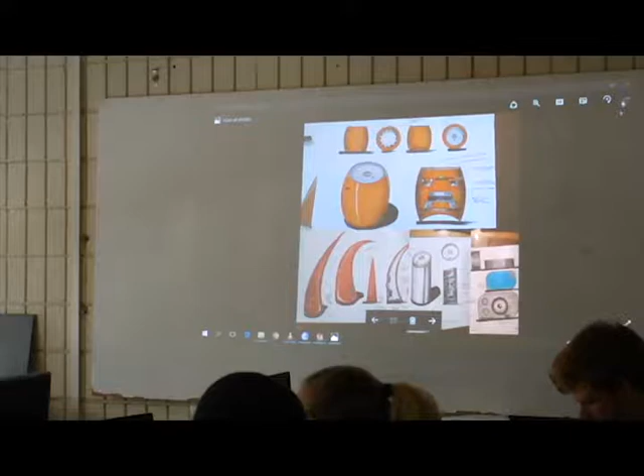So you guys know you'll start off from here with sketches, and it's nice, but if you go to a client like this, they're going to laugh at you. It's just not where industry does things anymore.

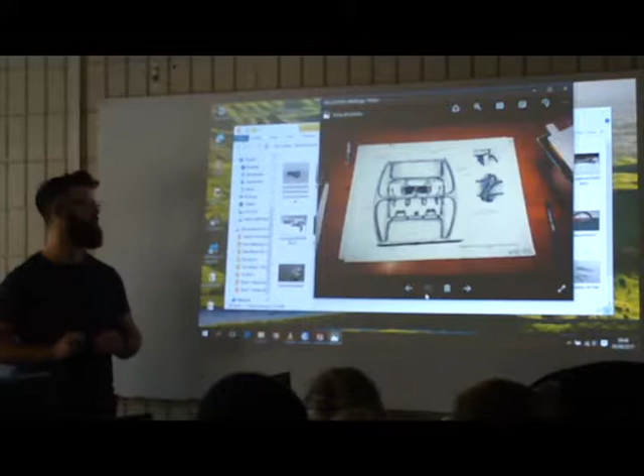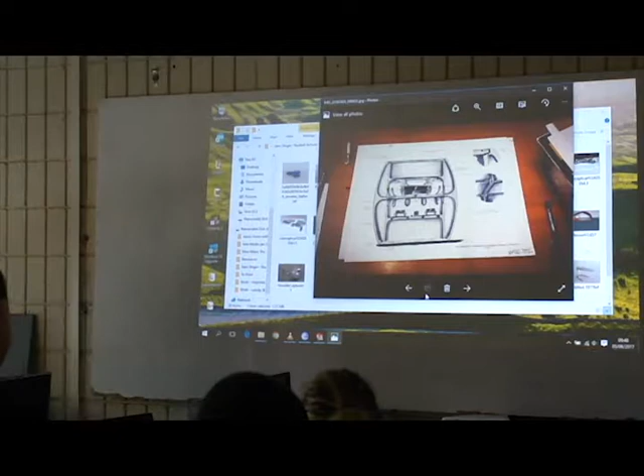So then you go from this, and take it into SolidWorks—this is one of the tricks I learned for getting really nice illustrations and drawings. You take it into SolidWorks, you can import it, make the technical drawing, and then render it. So you get really nice detail, you can do bubbles, all sorts of cool things, and just fake it out. Remember, it's more about how you get the result.

They just care about the result versus the process, and as long as you're good enough to fake it, like this, you can get away with it. So it makes things really, really easy.

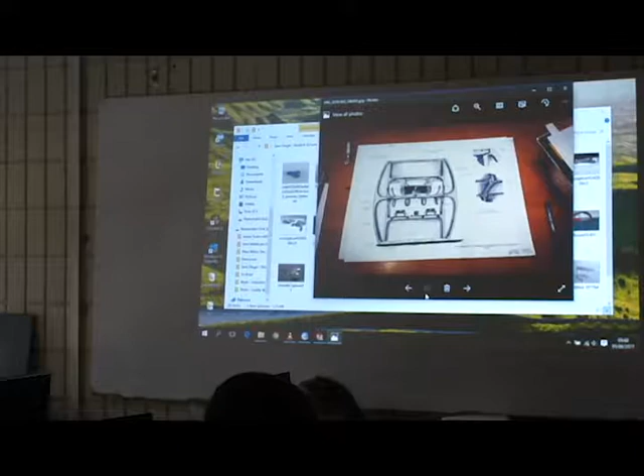And if you, like me, struggle or have a shaky hand, whatever, it's a really nice thing. It also enables you to leapfrog a process because you've already done the technical, so it saves you time later down the line. You can spend more time actually refining your prototype and your proper model, which is really, really cool.

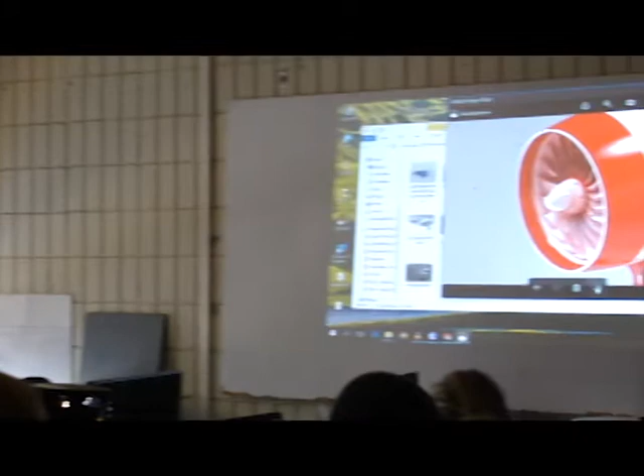These are just some of the works I've done to show you what you can do in SolidWorks, and how—hopefully... Is that all rendered in SolidWorks? No, this is Keyshot. These are just some of the things I've done and the way you guys will end up doing them.

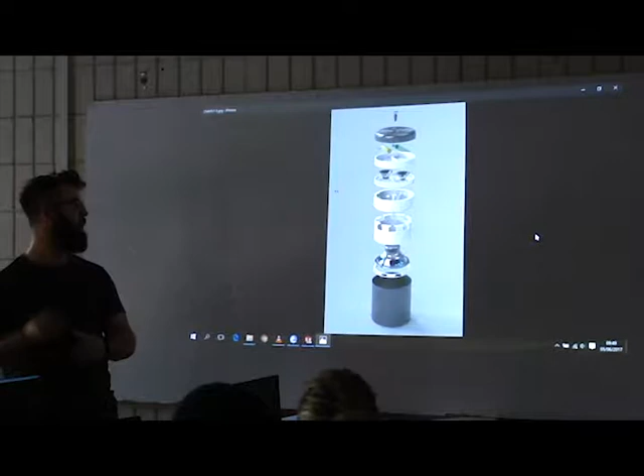And it's really cool for now—if you go into your presentations and processes next year and from now on, it's really nice when Darren or Craig or Chris asks you to explain the part, if you have technicals or product explanations.

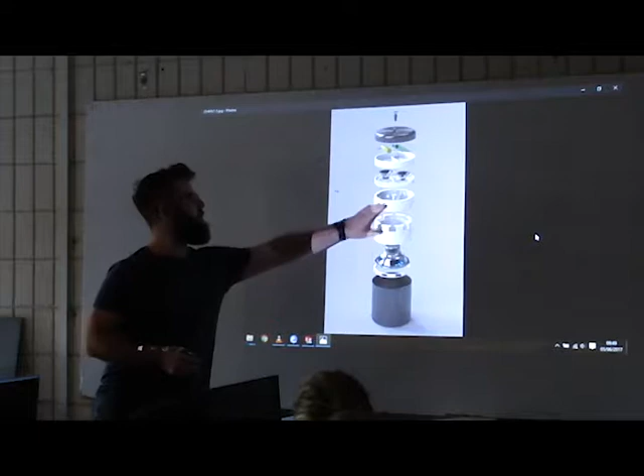You can now walk people through your parts using SolidWorks and a nice rendering program. You can justify, okay, I used this here, I can use this there, and it just takes your work to a really professional level.

And these are just, I don't know if you guys did them, the plugs that we did in third year. So I think you guys may do this, and it enables you to get really nice detail.

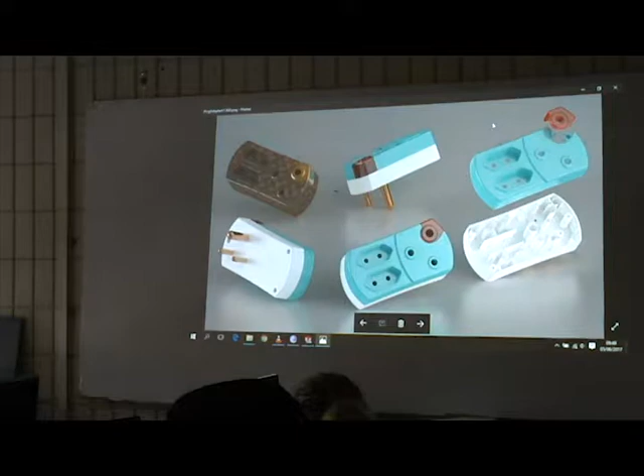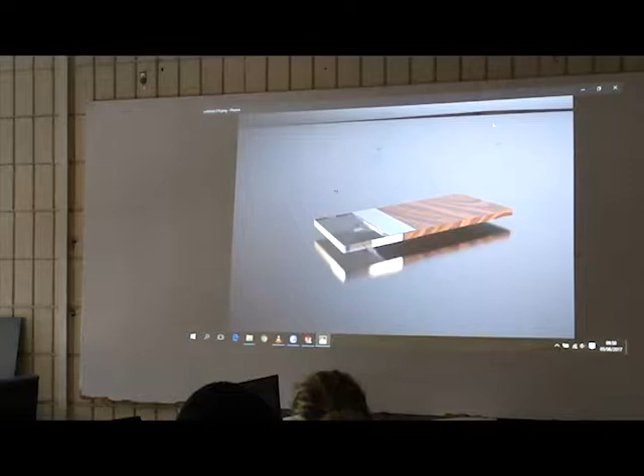Which, drawing-wise, is just a bit of a mission. I'm also going to be referencing these when I talk about certain features. This was my table from second year—so what you guys did, this was mine. This is just the rendered version. Concepts and stuff, yeah, that's pretty much what you can do.

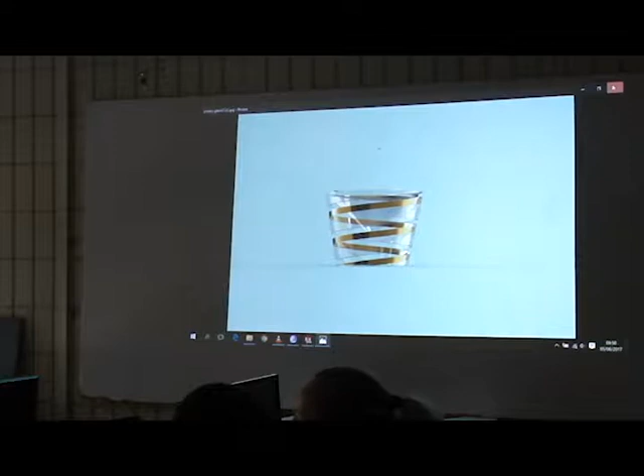And I'd like to note, none of this was done with surface design—this is all just general, easy things. Also, the benefit of CAD is you can go from this, from CAD to 3D printing, and then you have a cool little toy, which is really cool. It's fun to play with.

Yeah, this was the bike project. I don't know if you guys will probably have to do that. This was actually done in Solidworks and then popped into Keyshot.

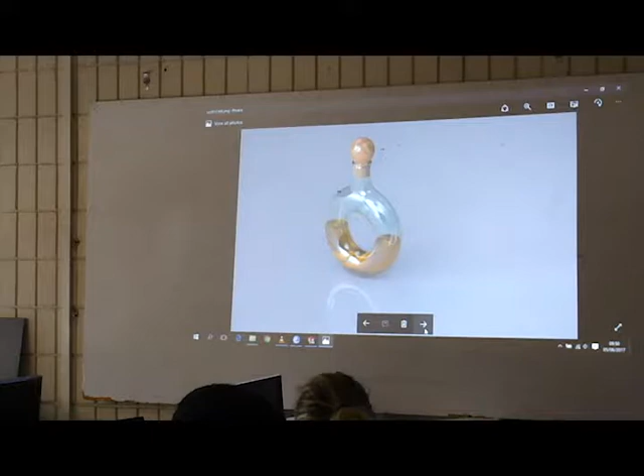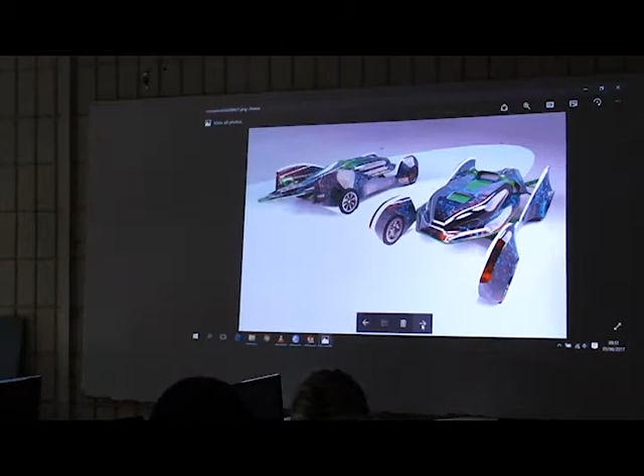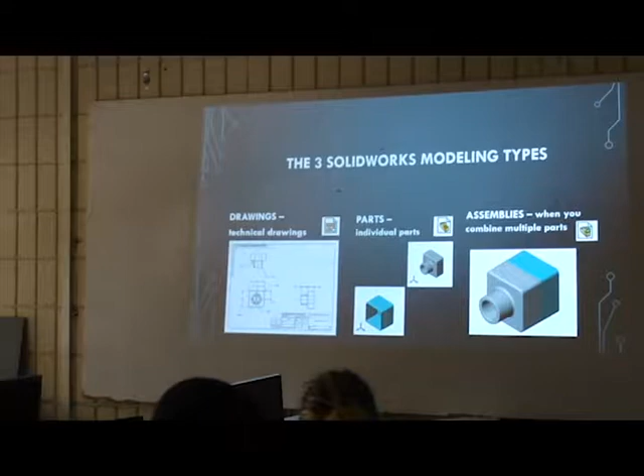Cool, now that's out the way. So yeah, it really makes life easier. Welcome. So there's three types of things or models you can do in SolidWorks. You're either doing technical drawing, parts, which comprises of a solid part or a surface model, or you're doing an assembly, which is combining multiple parts and multiple components. Everyone with me? Yeah, okay. If I'm going too fast or whatever, just say.

So now if you guys want to open your first page, you go here, just so we're all on the same page. I don't know why this thing doesn't work. Oh, what's happening there? Is it not maybe to the left? It's an extension of it, because your mouse pointer was there. Oh yeah, so if you just drag it over, sweet, okay.

There we go, sweet. Cool, so if we just click on this button here, which is this little blank page. This one also.

You're going to see here you have a part, assembly, or drawing. This is how you start everything in SolidWorks. You choose what you want to do. So we're just going to select part for now. There, give this computer a minute.

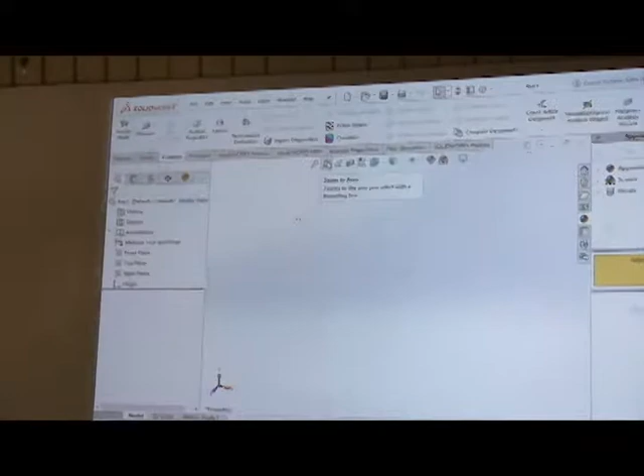And then these are your views, so zoom to area - if you have a large part, you start dealing with assemblies, it snaps to certain components. This is sectional view, so you create something and then you want to see the inside, you click this and you can do a sectional. And these are your different types of views. You have shaded with edges, just shaded, hidden lines removed, hidden lines visible, and then wireframe. And I'll walk you through all of this later.

But this is your appearances, so this is important for when you start with the 2D. But before we get there... Cool, so it's just the orientation of your part. And these are always what you work off.

So you start with a sketch on a plane, or you reference a sketch. If you have a surface, now you want to pull something out, you're going to reference a plane to tell it which direction you need to pull it or push it. Everyone with me? Cool. Then a very, very important thing is, which a lot of people make the mistake of, they start their drawing over here or there, up or down.

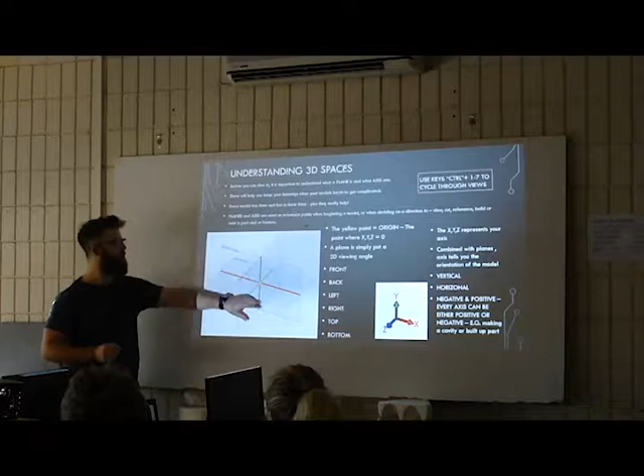This thing, this yellow dot, is the origin, and it's very, very important. It's the center of your design, so it's like where X, Y, and Z are 0, 0, 0. And if you can, always try to keep the center of your design at 0, 0, because when you're doing a cut or an add or section, it just makes your life much easier.

Otherwise, when you import it into technicals - say this is your page, although your origin's here, now you've made a part here, so your part's going to be floating on your page here instead of where it should be. When you have your front, left, and top views, it's just not going to be like that. So center is vital.

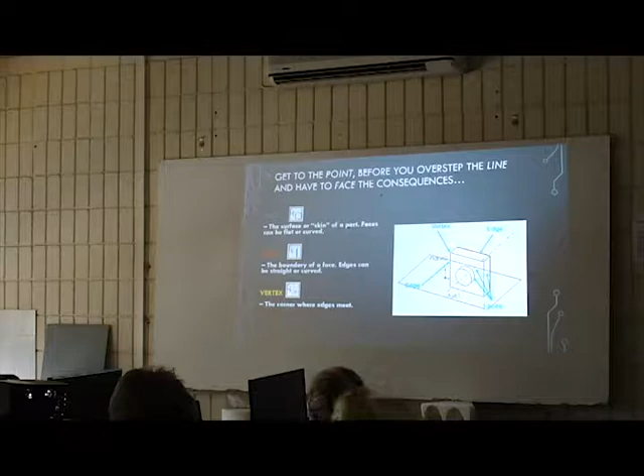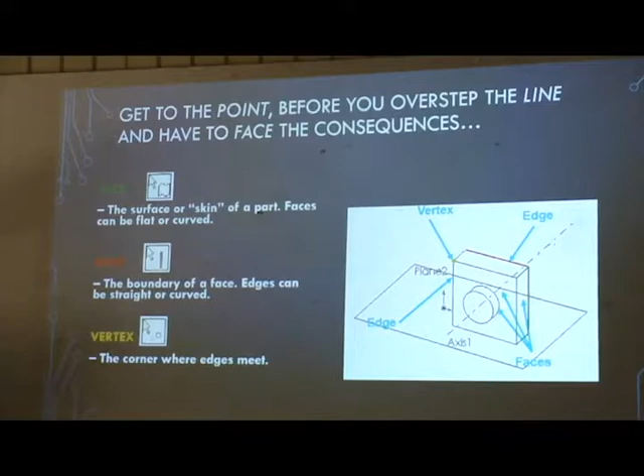Next, cool. So as with any shape, you've got a face of the shape, you've got an edge, and you've got a vertex. So this becomes important when you're doing referencing of angles and points. A lot of SolidWorks is all about referencing and points. So it sounds very technical and pretty clinical and boring, but it makes life easier if you understand these terms.

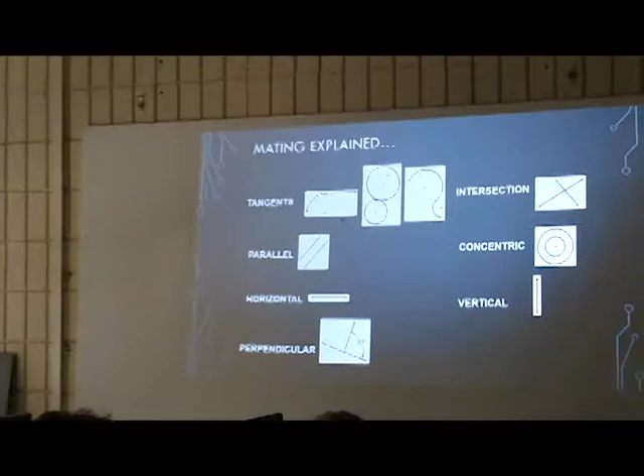Where do those sort of terms come up? Like if you're selecting an object, it'll either select the vertex of that, or is that sort of what? Yeah, I'll show you in the examples. This is just the theory side. It's kind of boring, I just want to get through it. Then I'll do a walk and talk through them all, but just so you guys have a basic theoretical understanding.

You guys all have done, or hopefully would have done, that. So you know perpendicular, horizontal. These become important when you're doing assemblies, so you want to put pieces together to make sure they're aligned well and that your measurements have actually worked out, and you can see if they have or haven't, as well as your sketches. When you're doing holes and certain things, they become pretty important.

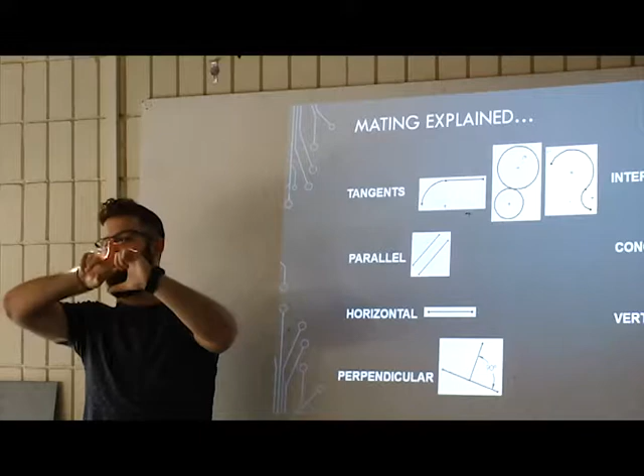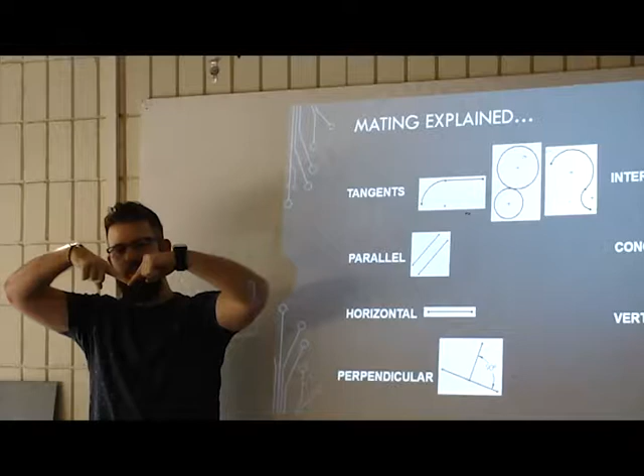And one thing a lot of people forget is tangents. Tangents are really important, because when you do a model, say you're making a box with a little round piece, a lot of people will just put a circle or an arc there, but they'll leave it. So when you create your part, you've actually got a little piece like this. If you click on this piece and that piece, you set a relationship which makes a tangent, which means your surfaces will now be smooth and curved, which a lot of people forget, even in my class, which kind of irritates me.

So always remember tangents and concentric things. A lot of people just assume in SolidWorks that if I put it on the same vertex, it's going to be in the middle. Like here, you can see these dots and centers. SolidWorks will do a snap to, but it doesn't necessarily mean that it's exactly concentric. So you always have to set that relationship. Otherwise, you get to manufacturing and they're like, sorry, your holes don't line up. Even if it's off by a point of a mil, it makes a difference sometimes.

So one of the main things we're going to be doing is first creating a feature, a box in this case, or you can pick any other shape, and extruding it. And then we're going to cut the feature and use fillet and chamfer. Those are the main things we're going to be doing. Cool, guys. Everyone here? Cool. To start anything, we've got to select the plane, which way we want to do it.

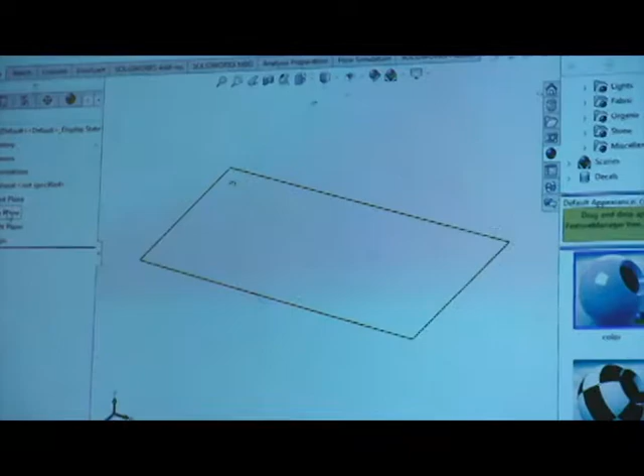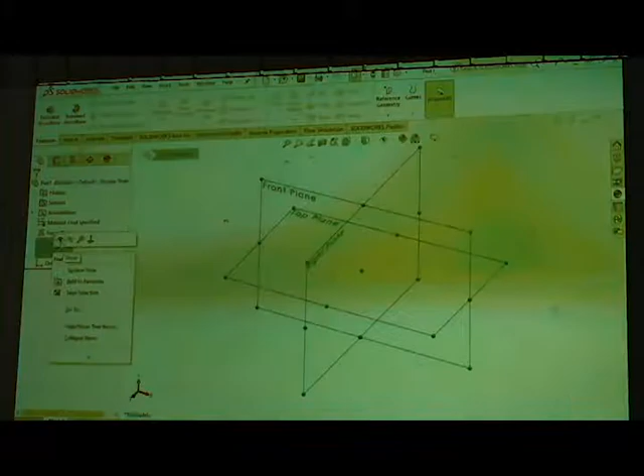Does everyone have a pen and paper, or just draw along? So you hold shift and then click on the front plane and then that. So it looks like this. And you right click and you see the little eye here. Around here. Good. So hold shift. Click just there. Click it and now press shift again. Hold shift, and press it the right way. There you go, right click. Good, did everyone get that?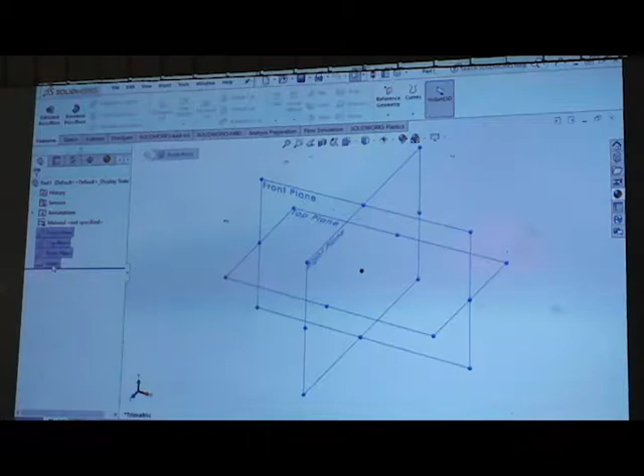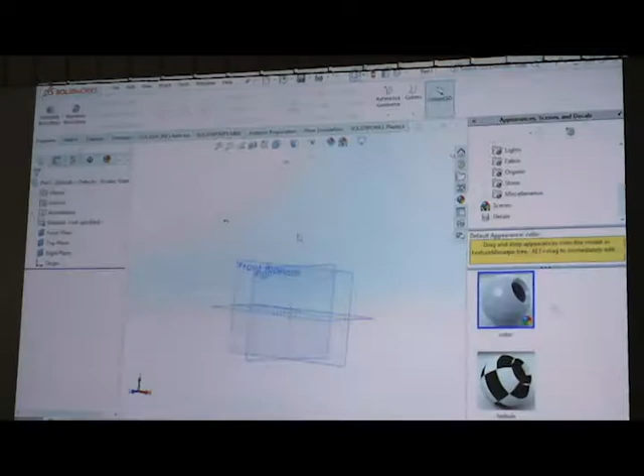Yep. So click on front plane, hold shift, click on origin, right click, and then we're going to go here and go show features. So you should have something looking like this. Hold shift and right click. Cool. Oh yeah, in terms of viewing, if you click the scroll button down, that gives you the ability to move it like this.

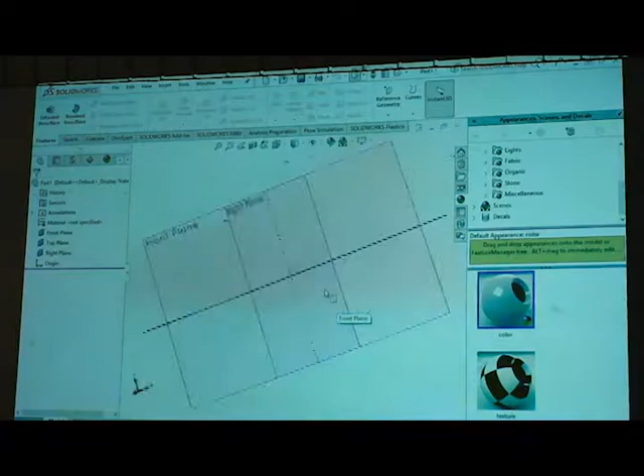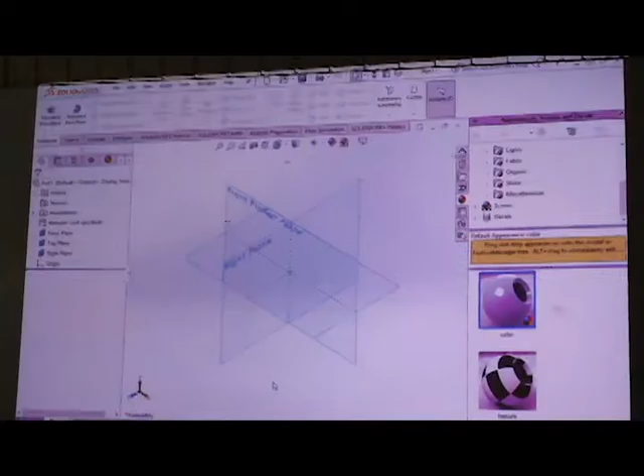What if you want to return back? Cool, so that's the next thing: understanding the planes. This is why it becomes important, because now you're like this, and you're like, where's my design? So you go control 1 through 7 to determine your views. And it always tells you here: front view, back view, left view, right view, top, bottom, and isometric. That is so cool. Yeah, so you hold control and click 1 through 7 to determine your views. Sorry. Click on that.

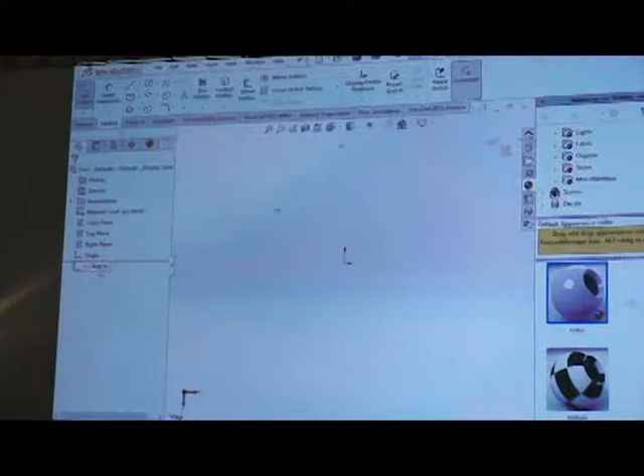Now you're going to click on it. No, one more. So just to repeat what we did, we clicked on top plane and we clicked on sketch. So this initiates a sketch. And you see now here we have a little thing. This is now the beginning of your history or your tree, which now has a sketch.

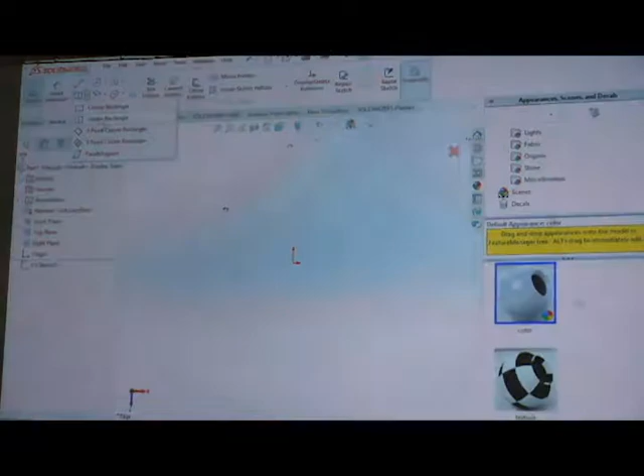But now we're going to add something to it. So now you're going to click on this. You're going to click on center rectangle. These are all just different styles and formats with which you can create a square or rectangle or four-sided shape. But for this purpose, it's just easier. You're going to do this. Then you're going to pop it over here to your origin, to our highlight. Everyone here? And just drag it out, whatever.

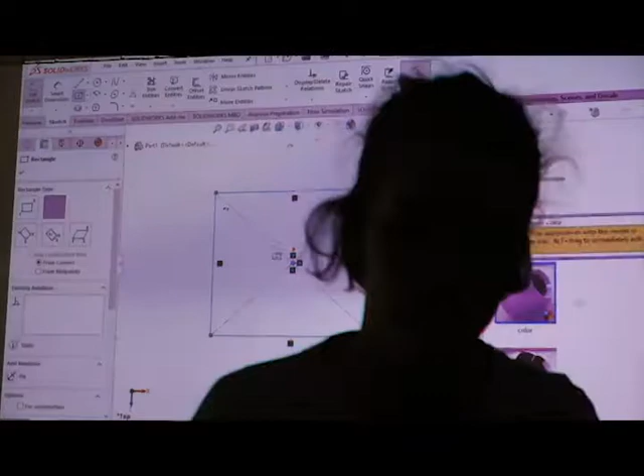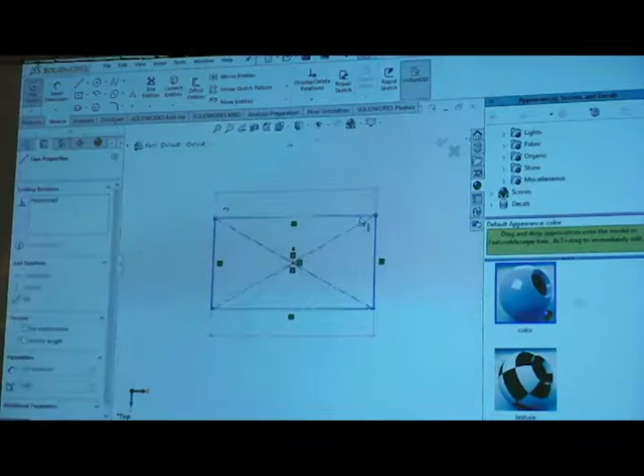Now you're going to see some certain things pop up, and these are your relationships. So this line here, this dotted line, these are construction lines, and then these are your solid lines. What this means is that when you create a shape, SolidWorks only recognizes these solid lines. It's the same as a technical drawing. They're there, but they're not considered in use. So they're more for referencing and measurements, and you can see how they manipulate the shape like that.

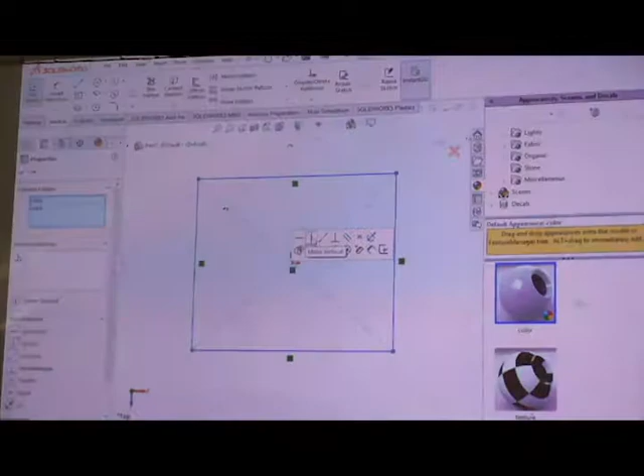And then what you can do is what I was talking about earlier. You set a relationship to make sure if you're making a cube, which for this example I will be, you click on the one, you click on the other, and then this pops up. These are your mates or your relationships, where you tell it, do you want to make these equal, parallel, perpendicular, collinear, vertical, or horizontal? You just want to make them equal, for instance. Everyone following? Just to run through that again.

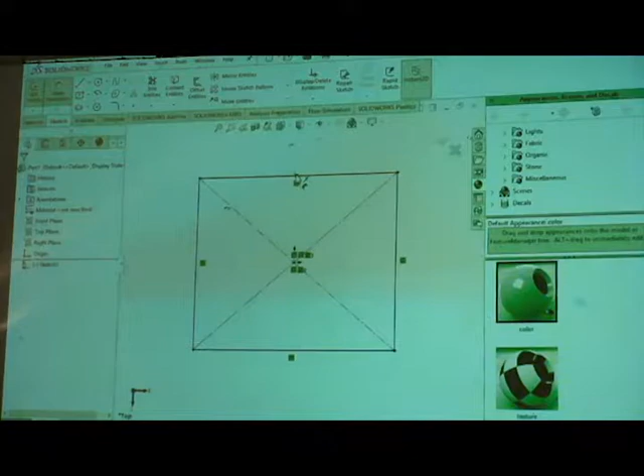So this is called smart dimension. There are a couple of other ones, but in general, smart dimension just works. It's smart for a reason. So what you're going to do is you can either select a point, and there you go. You see there's a little line that will appear, or you see how it changes just above there. It goes from a line to a line at the point, and this was referencing what I talked about earlier with a vertex or an edge or a surface. But at the moment we don't have a surface, so we just have a vertex or edge.

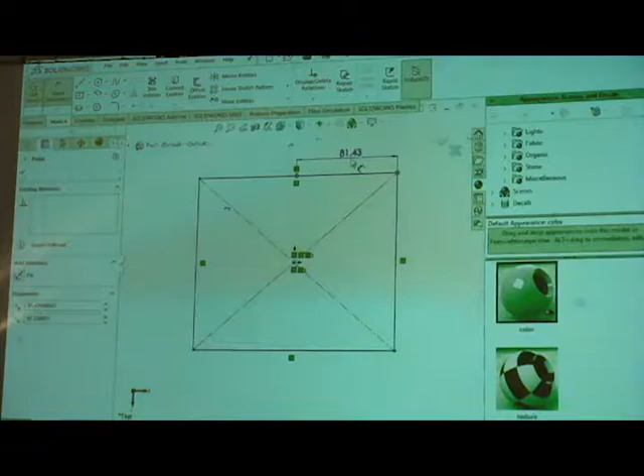You can either dimension from a point to a point, like that, or, if you're not happy with it, so you click the point to a point, you're like, cool, oh shit, I made a mistake. So what you can do is just click there, and there. For some reason, there we go. Yeah, so you just click delete.

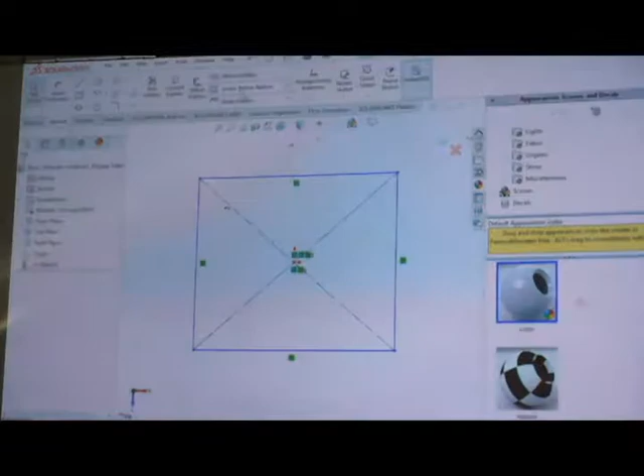You can customize your SolidWorks a bit differently, depending on how you want. So if you right click, you have this menu over here, which has got all your sketch tools and things like that. But in general, just keep it here. It's an easier setup for you. You don't have to fiddle around if you don't want to.

But bottom right, you see here MMGS. In South Africa, we use millimeters, and in technical, we use millimeters. So you always have to make sure this is ticked as millimeter, gram, and second. Where? At the bottom here. So for ISO, like technical drawing standards, we use millimeters. That's down at the bottom right, over there, it says MMGS. Everyone see that? My hand is recovering. The bottom right, make sure it says

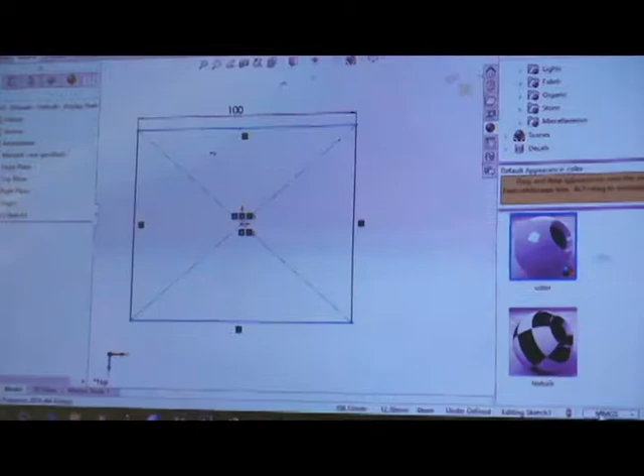MMGS, and it's ticked. Extruded cut is just easier. So what we're going to do is now every surface becomes a plane, if that makes sense. So think of every surface like a canvas to create your 2D sketch on. So you're going to click on it, make sure it's blue. Everyone here?

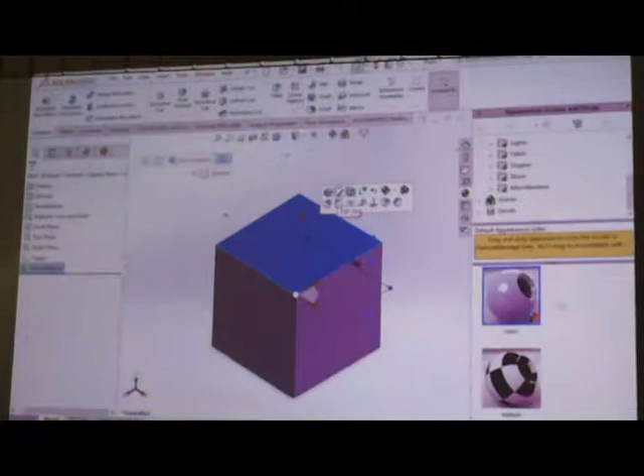No. Yes. Cool. Just click on the top. There we go. So then your little trusty menu on the side will come up. And this is something that stumps a lot of people. You see here you get sketch, and here you get edit sketch. If you click on this top one, edit sketch, it takes you back to your original sketch.

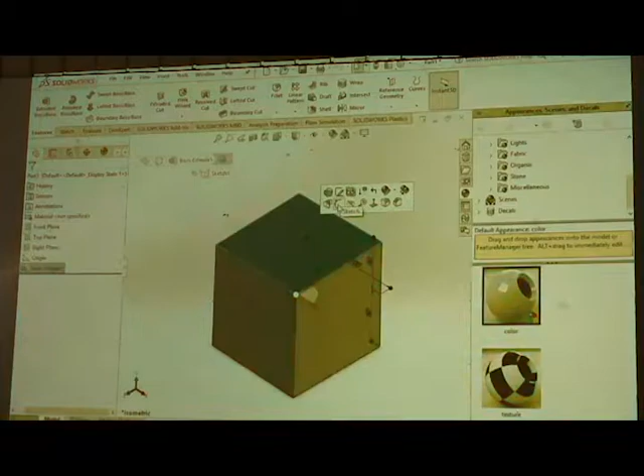So sometimes it's nice: if you realize there's an error when you've got to the end of your design, you can click edit and go back to your original sketch. But for now, what you do is you click sketch. This enables you to edit the highlighted surface. Or you can click on this top bit here, go back to sketch and do it here. But clicking here, you see there, it popped up.

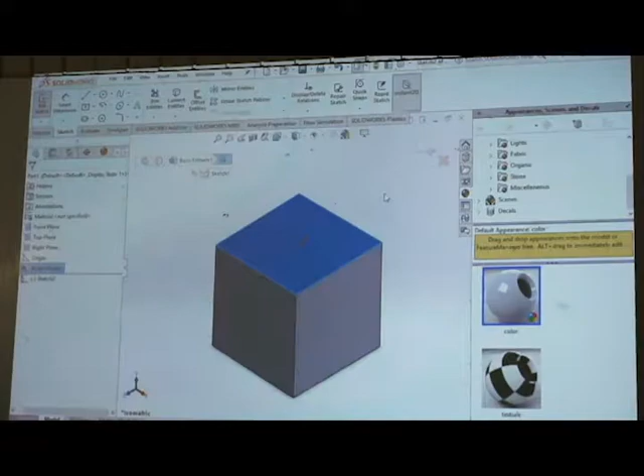Now next to the mouse we've got a little blue square. This means it recognizes it as a surface. So we're going to click sketch. Now we know that this is isometric, so we know that this is the top view. So we're going to do Control 5. That will take you to your top view. Everyone here? Everyone following?

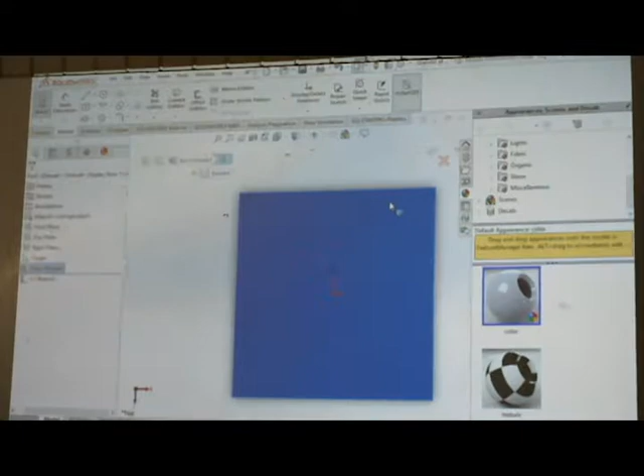So now what we're going to do, there's two ways we can do... Sorry, just right, it's fine. Yeah.

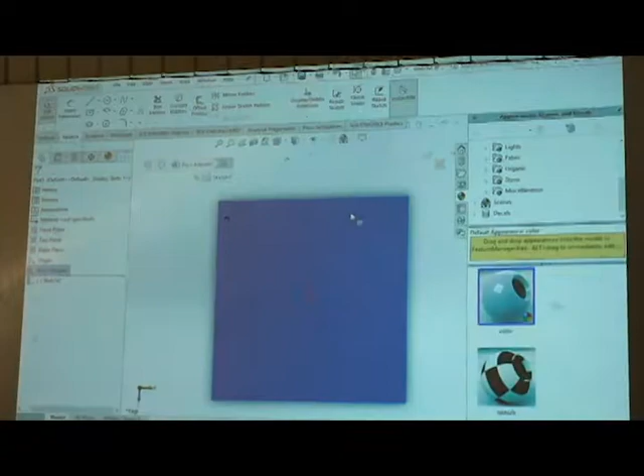Now what we're going to do is there's two ways to tackle this. You're looking at these fields over here. You're going to use convert entities or offset entities. In order to make the shape, the cavity, you have to get the outline. So you can do convert entities, and you see what it does now is it creates an outline, a silhouette of the exterior of this blue shape. So that's one way to do it.

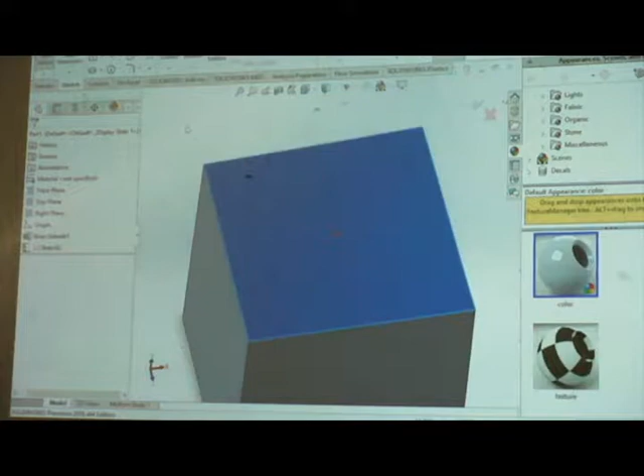So sometimes if you're creating a shape from scratch, instead of using a tool, it looks like a square, you can zoom in, the point looks like it's connected here, but I know that I've got a tiny little gap. So I go exit, and it says there's a problem with your sketch or feature. Because you left the gap, it's like if you have a box and you puncture a hole in it, the liquid's going to fall out.

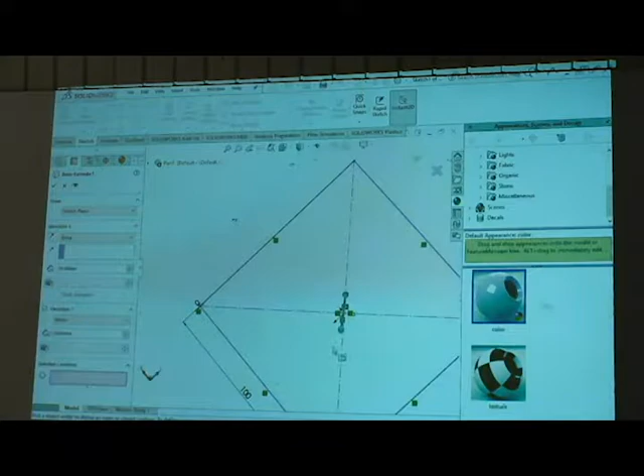It's the technical equivalent. You see it won't allow you to select your contour, because your shape isn't closed, it's not fully defined. You see here it will say underdefined. So now you've got to go back. Don't freak out, don't worry. You can look at repair sketch. This will show you tiny little gaps. You can make it either bigger or much smaller. It can show you gaps and errors in your work quickly, like that.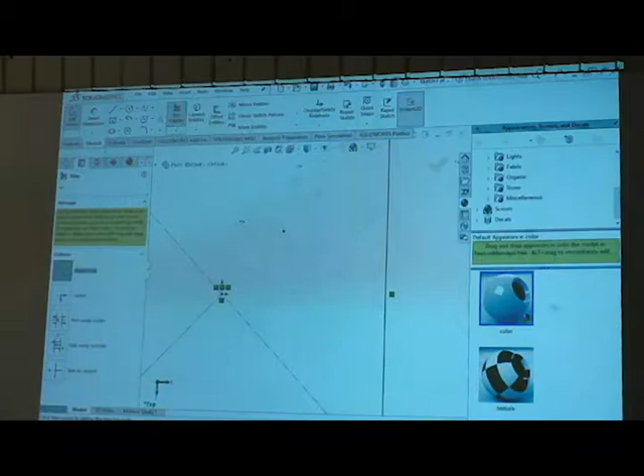And if you want to join them up quickly, you know there's a gap, you can use the trim tool, select power trim, like that, and there you go. You fix your piece. Power trim's literally what it says, it just trims pieces. So you click on the other like that, and then extend it back. Like that.

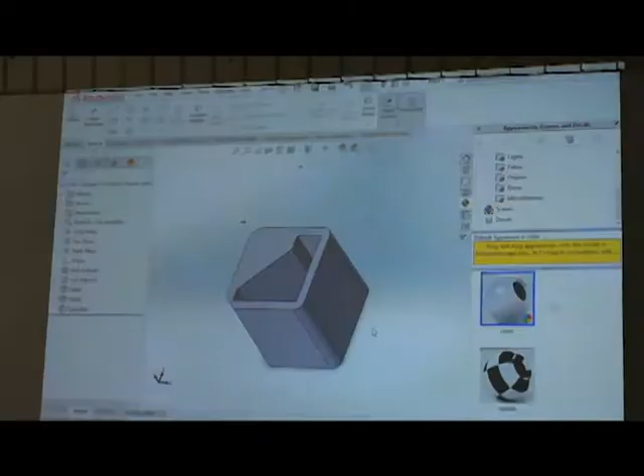Document. Close that one. Just a new part. New blank part. Shuffle next to you. Cool guys, everyone there? Just blank part.

Alright, good. You guys have 10 minutes to create your own shape using what you've just learned. Anything, there's nothing wrong, nothing right, as long as you show me a chamfer, cut, fillet and extrude. If you need help, shout. As long as you include all those features in a design of your choice, using any shape, any size. And you can use any plane. I just use top plane so that you can click on a plane and select it. Doesn't matter which angle, which side.

Ooh, what's happening?